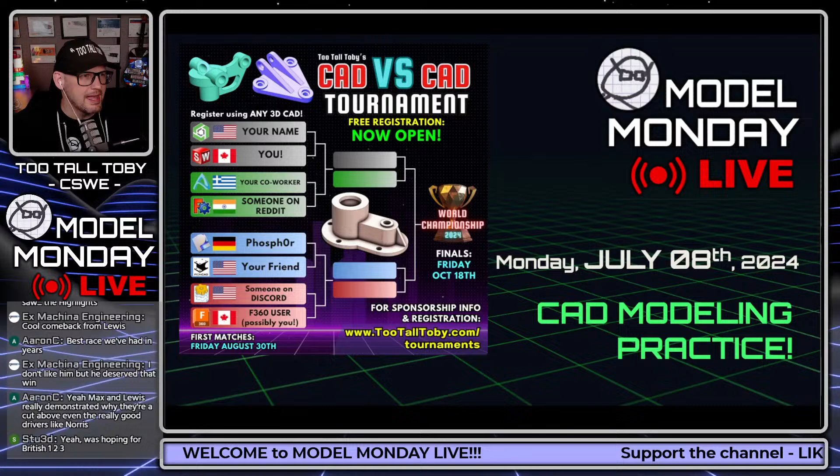Alrighty, let's get into it here. Welcome, today is July 8th, beautiful July 8th, beautiful Monday, what a great way to start the week. Monday, July 8th, and welcome to your CAD modeling practice, Model Monday Live, where you get to compete against other members in the chat. Today we're going to do 2 of these CAD speed modeling challenges, you versus the chat, we'll see who's the fastest in the chat. We're going to do a tournament update, we're going to talk about a live solve using SolidWorks, and of course we're going to interact with the best chat ever.

Today I'm going to do this as the live solve. This was the challenge that I dropped on the YouTube channel on Thursday, the 4th Fireworks, it's called. And it's a cool model, it's not really that difficult, it's only tier 3, but there's some really cool stuff that we can learn from this model. Of course, I'm going to show you guys how to do the candy striping that's running up the body of that rocket as well, some cool techniques you can use to do some split line action there.

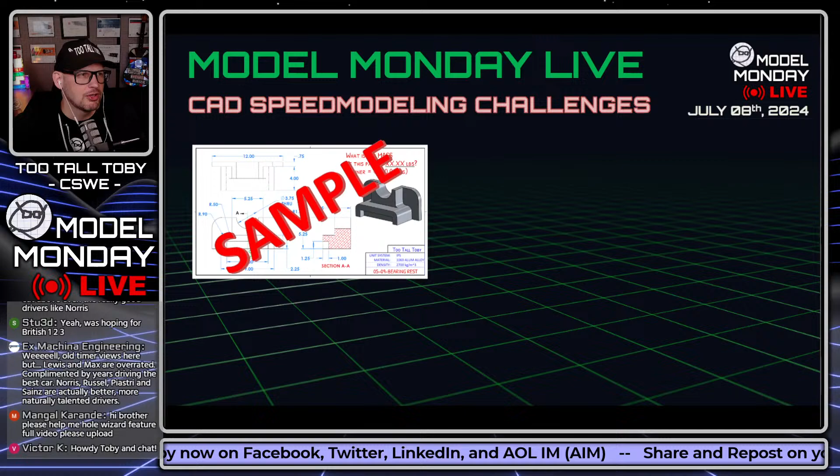And with that, let's get into it. I know what you guys are all here for, I know you guys are really all here for the F1 debate in the chat, but I think some of you maybe are also here for the live CAD versus CAD challenges. So let's go, we're going to show you guys a 2D print, and we're going to have you turn that into a 3D model as fast as possible.

Victor K joining us in the chat, what's up, welcome.

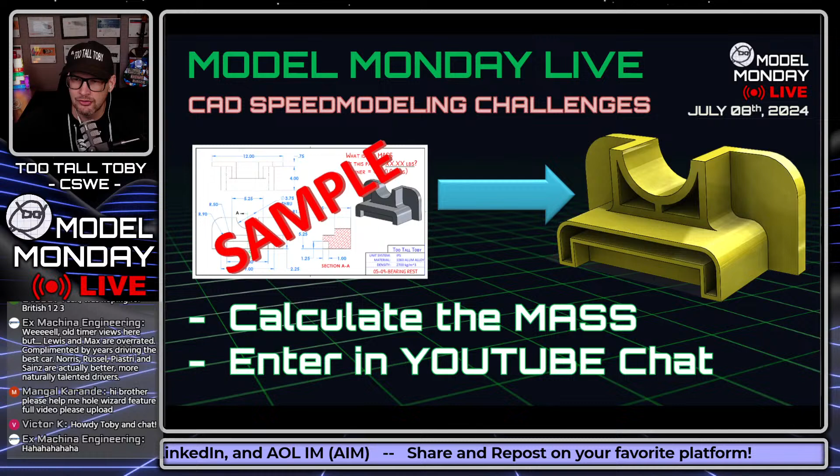Guys, after I show you this 2D print, you're going to try to turn it into a 3D model. You're going to try to calculate the mass, and you're going to try to enter that mass directly in the chat in YouTube. The first person to enter that mass correctly is going to be declared the winner. It's going to get points on our Model Monday Live leaderboard over at TooTallToby.com.

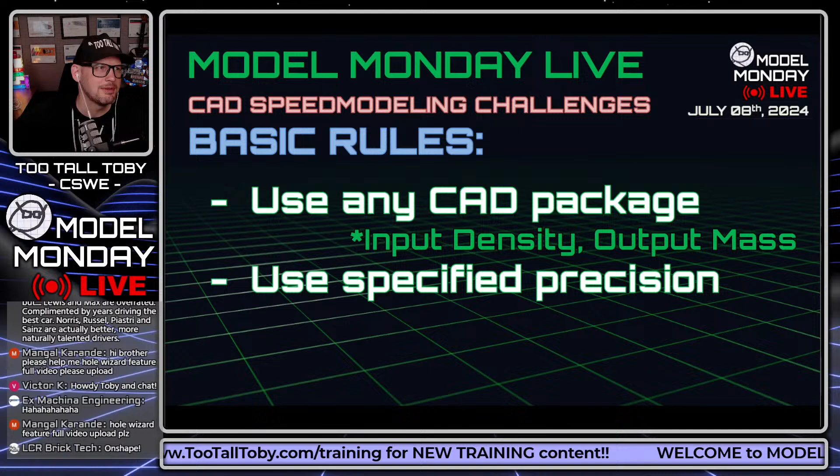Guys, if you're competing today in Model Monday Live, here's the basic rules. You can use any 3D CAD package, we are truly CAD agnostic here. You're going to input density and output mass, meaning as long as that CAD package can accomplish that. Even some CAD packages can't do that, they can only do volume, and then our users manually input the mass and calculate it. That's fine, any 3D CAD package can be used here. But make sure when you answer, you use the specified precision. Very important, use the specified precision. LCR Brick Tech, giving a shout out to Onshape, always good to give a shout out to Onshape. And guys, the first person to answer correctly in the chat will be declared the winner.

So I'll show you a 2D print, you'll try to turn it into a 3D model. Here's the unit system and the densities that we use.

Jonathan, you mentioned you're here for the first time. Mangal, I think maybe you're here for the first time as well. You're going to want to make sure that you take a screen capture of these densities and add these densities to your materials library. If the density is not correct, then you are not going to come up with the correct answer, that's for sure. So if you're using something that has the material library and the densities are different from these, take a second and create a custom material.

Today I'm drinking, oh this is kind of cool, a cherry limeade Waterloo. Look at this thing, cherry limeade. Let's go, pretty good, pretty good. I like those blackberry lemonade ones, I think I like those a little more.

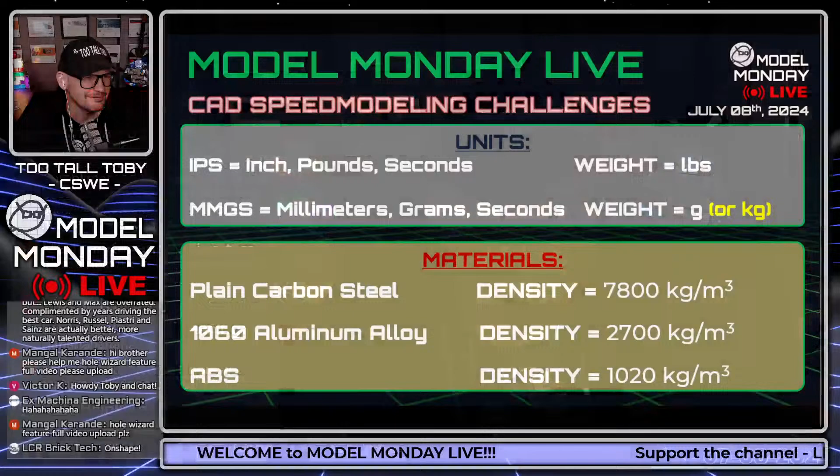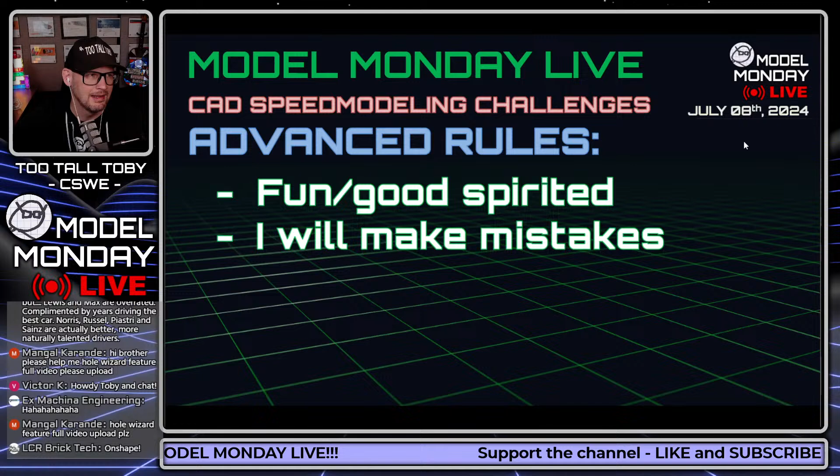All right guys, hopefully that was enough time for everybody to grab a screen capture of these densities, because now we are going to get into this challenge. It's meant to be fun and good-spirited. Occasionally I'll make a mistake, I'll miss a dimension, something like that, we'll just do an audible and try to resolve it. And the Ivan exploit is permitted, I got a video on that coming soon. The Ivan exploit is permitted during Model Monday Live.

So with that, let's flip over to full screen here. And as soon as I show you this 2D print, you're going to grab a screen capture, maybe put it on your second monitor, and then you are going to begin modeling this challenge. Here we go, this Model Monday Live 3D CAD challenge begins in 3, 2, 1, go.

What is the mass of this part in XXX grams? The tolerance is plus or minus 1 gram. This part is in millimeters, using plain carbon steel as the material, 7,800 kilograms per cubic meter. Tier 4 part, probably the lower end of tier 4, but there's definitely some trickiness to this part that pushes it up to tier 4. It's called upper alignment cap, upper alignment cap.

So check it out, good luck to everyone. Grab a screen capture, we're only going to leave this up on the screen for a couple more moments. I'm going to take a sip of my delicious beverage, and then we are going to move on with today's live stream.

Your goal is to take this model, this 2D print, and try to turn it into a 3D model. And guys, we got Victor K in the chat, the world champion of 3D CAD speed modeling. This is your chance to play against the best. If you want to be the best, you got to beat the best. Victor K is in the chat, the best, he's here with us, and you get a chance to compete against the world champion. Good luck to everyone on this model, upper alignment clamp.

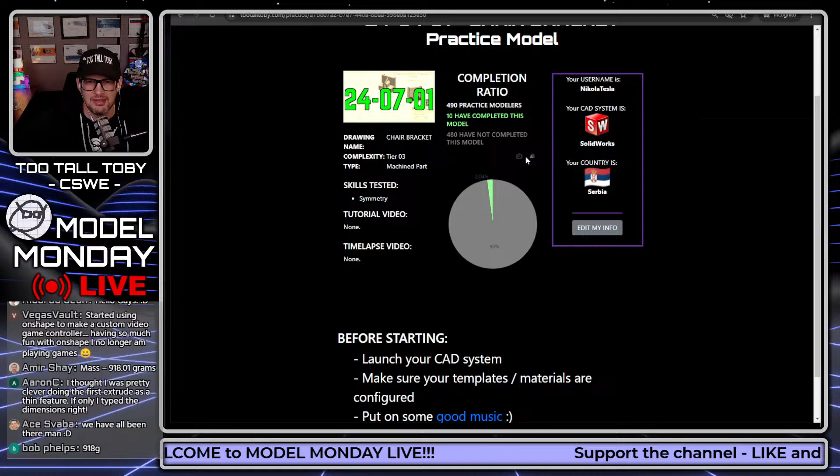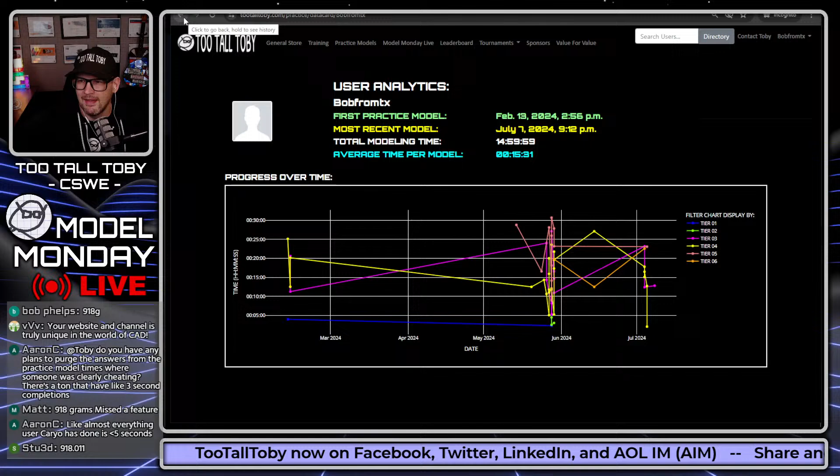So pretty cool that we can see all of these great analytics from all the users. Definitely a lot of fun. And I just think it's so cool that on this Practice Models app, we're not even doing any kind of push notification, and yet people are getting logged in here and right away completing these models almost the same day that I post them.

So if you're ever interested in getting more practice, we've got 58 models up there right now. We're going to have more and more. We try and do 9 every month. So check it out and enjoy, and good luck.

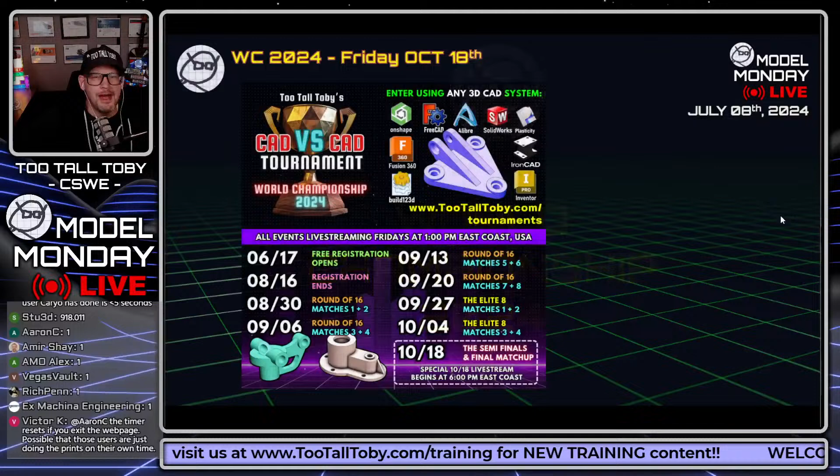Finally, the World Championship 2024 is upon us. We are currently in...

Those times don't show up in the per print analytics page. That's correct, yes. So Victor K is asking, is it possible those times are users just doing the print in their own time? Yeah, so a couple of comments are coming in here.

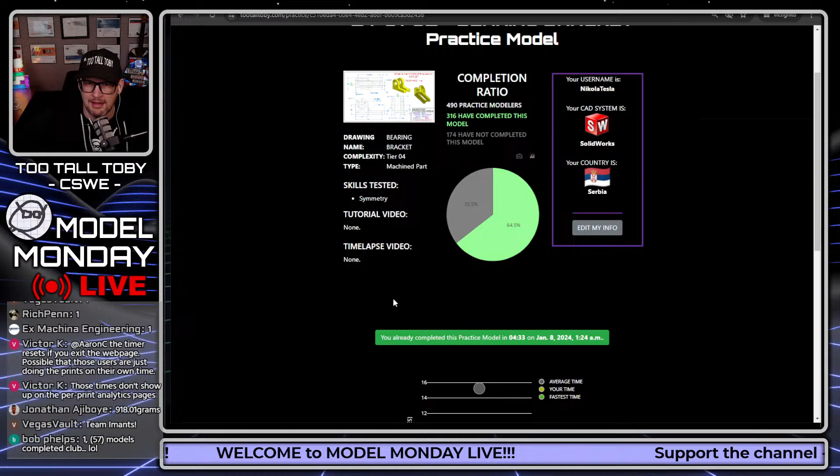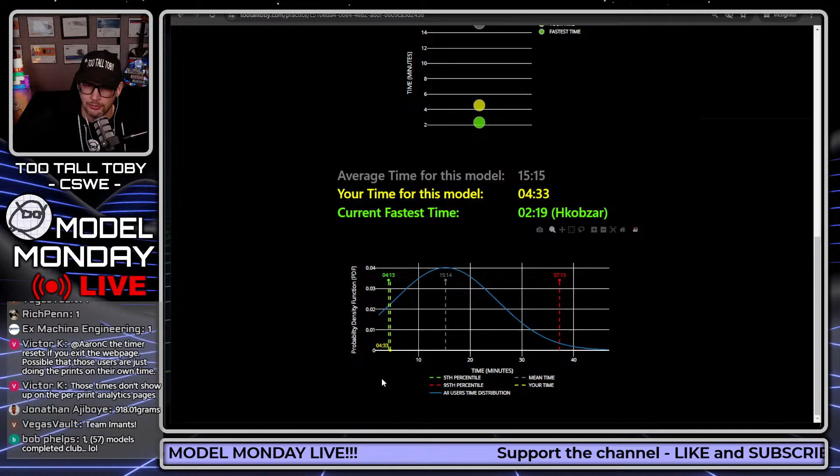Victor K is saying you could log into that Practice Models app and then back out of it and kind of game the clock a bit. And that's true—we want the app to be something for everyone. So that is true, you can get in here and view the print and then back out and do it in like 2 seconds. We do have a purge of a high and a low range on these charts. So anything that's under an unreasonable amount, we just purge it. On this one, it's probably around 60 seconds or something like that, so we just purge it. Although probably there are some speedsters out there that could do it in less than 60 seconds.

These analytics here are for that model, for that challenge. So this whole page, when you complete it, you're going to see additional analytics down here, like your time, the average time, and the fastest time. These are analytics specifically for that challenge.

Where this one here, in the upper right, this is my analytics, the analytics for you, the runner. And that's what we're seeing on the scoreboard too. So if I click my analytics, these are the Nikola Tesla analytics.

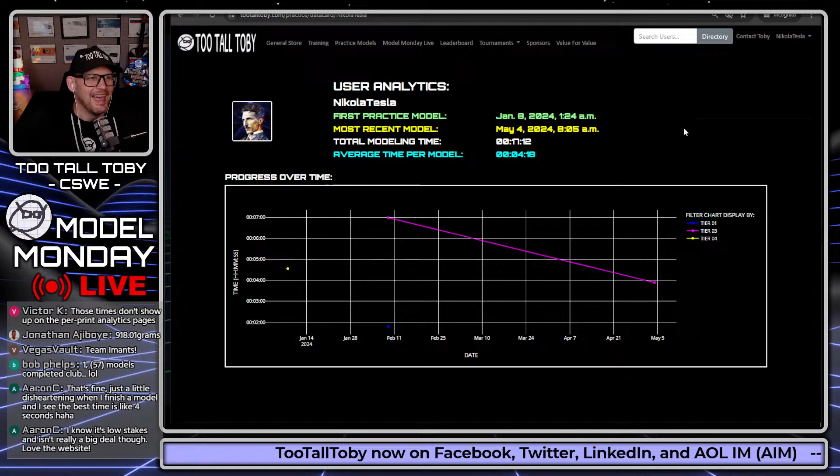I've done a total of 4 models, and my total modeling time is 17 minutes, and my average time is almost 4:20. That's amazing, 4 minutes and 18 seconds. And if you look at that community scoreboard, you can see some of the other users and go through their analytics as well.

Aaron C says, I know it's low stakes and it isn't really a big deal, but I love the website. Well, thank you. It's high stakes for me. If it doesn't work, then I'm going to be out on the streets. So low stakes for some, high stakes for others.

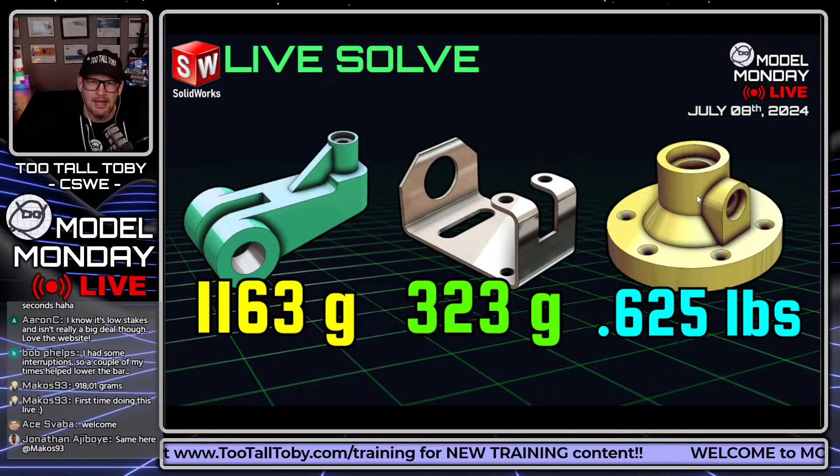And the tournament leaderboard is now live, so you can start to see how different people are solving these. We got QWERTY CA. A lot of people have been keeping an eye on QWERTY CA because of his fantastic performances here in the monthly leaderboard. If you go to TooTallToby.com and go to tournaments, let's go to the World Championship, you'll see that QWERTY is now here on the tournament leaderboard.

So we're going to get to see QWERTY live during the tournament, competing against other runners, and once again putting up an absolutely stellar performance, 3 minutes and 30 seconds using SolidWorks. Pedro Tavares, also very impressive. Anything under 5 minutes is like super speed as far as I'm concerned.

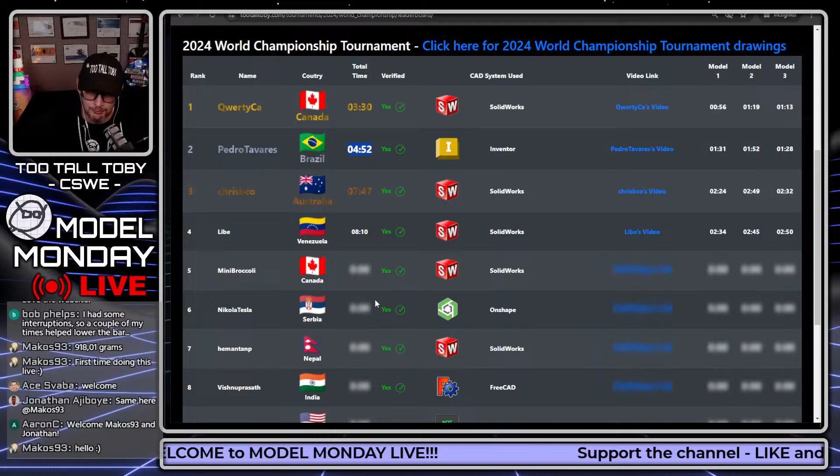My time was way down here, like over 10 minutes I think. So anything under 5 minutes is just outstanding, amazing. You know, chrisbco, he got third place earlier this year in the Spring Open, and look, he's coming in at 7 minutes, 47 seconds.

So it doesn't always matter who's the fastest on this leaderboard, but it is pretty cool because you can watch these guys' videos. You can watch QWERTY, watch Pedro, watch chrisbco, watch Libe's videos, and see how they're navigating through these models so quickly and maybe pick up some tips and tricks. Like QWERTY uses intersect a lot in these runs, and there's probably some lessons we could all learn there about using intersect efficiently to lop off huge chunks of the model. So check out those videos, definitely a lot to learn from those videos, live solving these parts.

In the tournament, all the parts are going to be tier 3 and higher. All of the challenges are going to potentially include sweeps and lofts with guide curves, sheet metal, and multi-body / multi-material. So make sure you're aware of how to do these things: sweeps and lofts with guide curves, and multi-body, multi-material in one single part file. It's going to give you a very, very fast time.

Makos93 says, first time doing this live. Nice job, good job getting an answer. That is awesome. Anybody who gets an answer in the limited time we have together should be very proud. And even if you don't get an answer, even if you just try, you should be very proud. This is not easy, and it feels very high pressure.

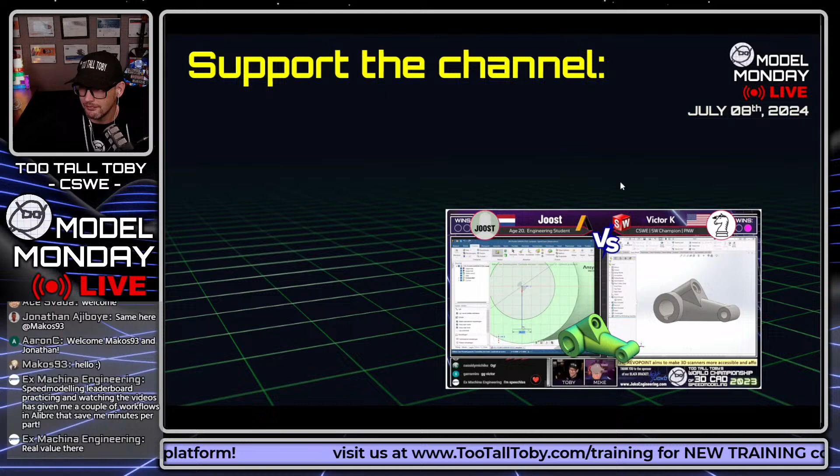Ex Machina says, speed modeling leaderboard, practicing and watching the videos has given me a couple of workflows in Alibre that saved me minutes per part. Real value there. Thank you.

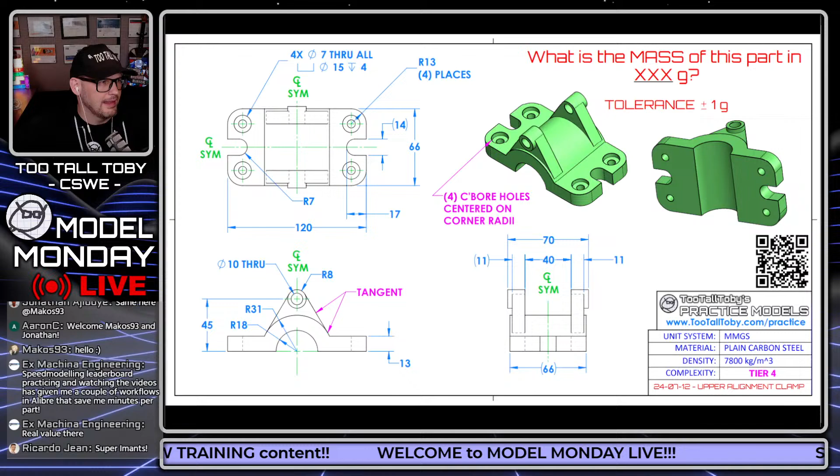Yes, indeed. All right guys, let's take a look at our first answer here. This model is pretty cool, the upper alignment clamp. I hope you guys had fun with this model. Let's take a look and see how we did. Saw those answers coming in. The first couple answers really came in fast, so very impressive. All right, let's go, let's see what we got here.

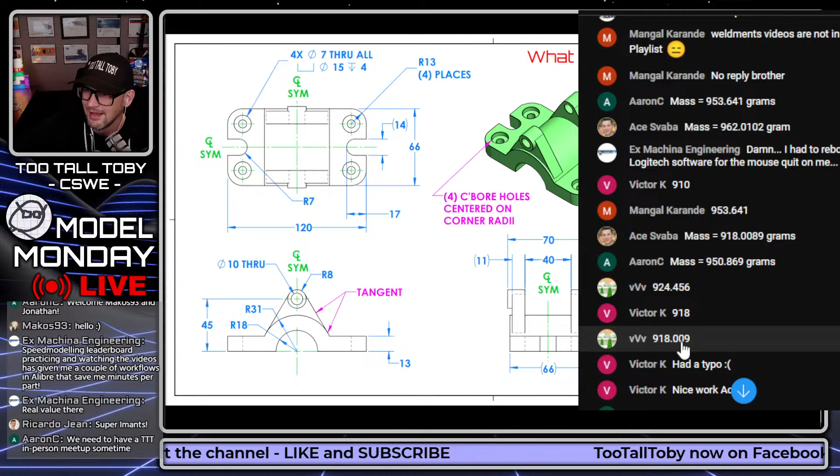Here we go. Aaron C coming in, 953.64. Ace coming in, 962.01. We got Victor K coming in, 910, world champion at 3D CAD speed modeling. We got Mangal coming in, 953.641 - oh, matching Aaron C. Interesting. We got Ace revising to 918.0089. We got Aaron C revising to 950.869. We got VVV coming in 924.4, revising to 918.009.

Aaron C revising to 918.009. That's amazing. I guess Mangal did the exact same workflow that Aaron C did, and that's why he came up with the exact same mass. So whatever Aaron C did wrong in the beginning, Mangal must have done the exact same thing wrong. That's amazing. We got Aaron C revising to 918.009. We got AMO Alex coming in 918 as well.

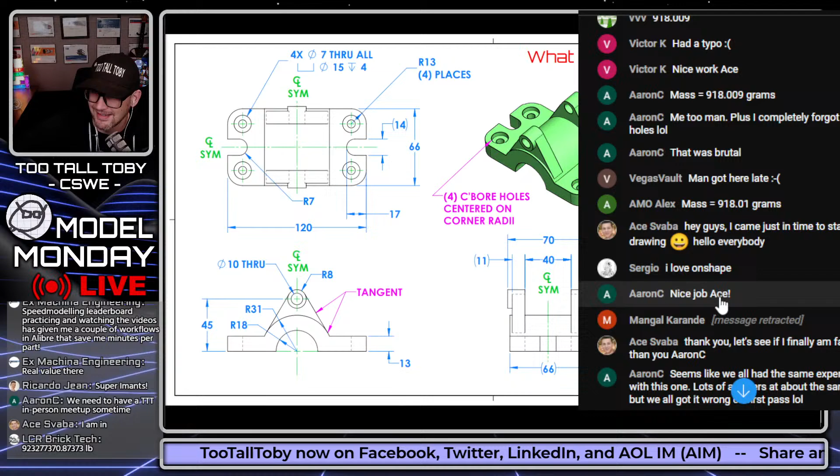Very nice, very nice. Some congratulations going out here already. I like it, I like it. We got Amir coming in 918, very nice. Bob Phelps coming in 918. Matt, 918 grams, missed a feature, nice. Stu, 918 grams, very nice. Jonathan, 918 grams, first timer, well done, well done. Makos here, first timer, 918 grams. And LCR Brick, looks like he just fired in a bunch of numbers there. I like it, I like it.

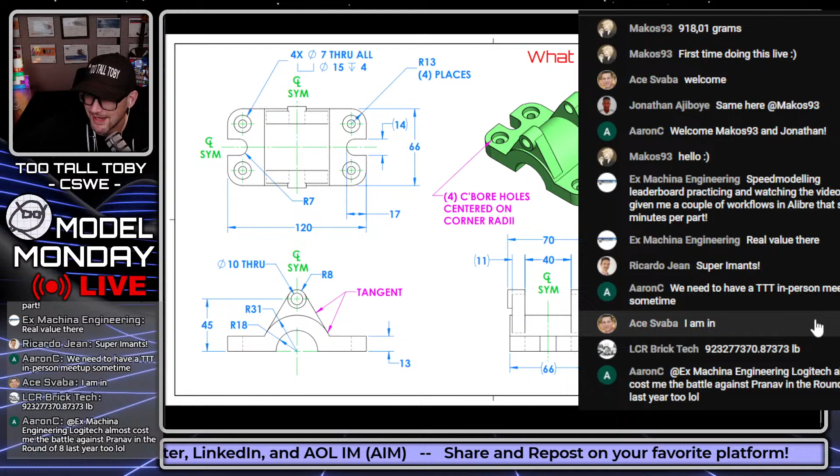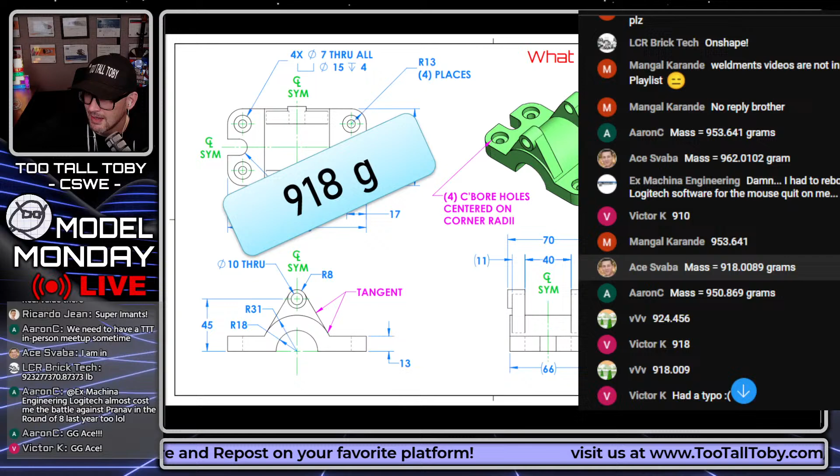All right guys, let's go. Let's see what the correct answer is. The correct answer is 918 grams. Well done, well done. I think that one goes to Ace coming in with the... wait, was it VV? Wait, who came in with the first one? Ace came in with the first one, right? Let's see, Aaron C, Ace, Victor K 910, Mangal, and then Ace coming in 918. Well done, well done, well done. Congratulations Ace, GG to Ace in the chat.

Oh yeah, oh yeah, very very nice. LCR Brick still trying to guess. One of these will be correct. Don't forget, you get unlimited guesses in Model Monday Live, LCR Brick, so one of these will be correct. All right, GG Ace, well done, well done. You're going to get recognized on the Model Monday Live leaderboard, earning a point here in this live stream.

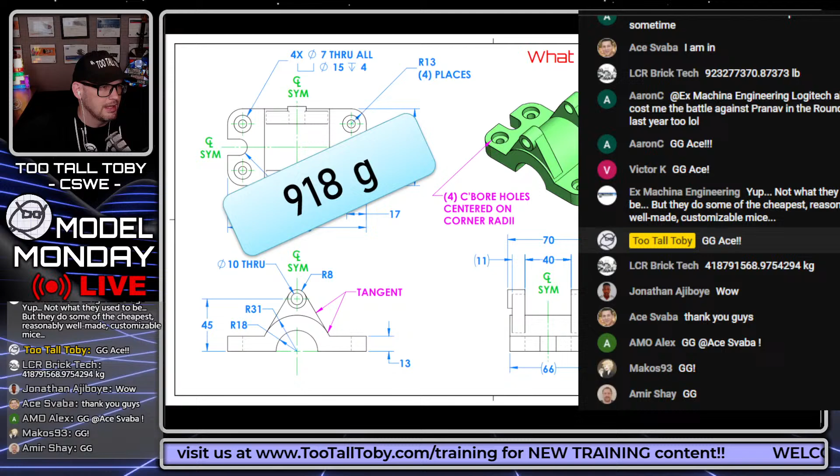Congratulations. Now, here's the question: can you do a clean sweep? Because this next 3D CAD challenge begins now. Guys, get your screen captures ready. This next 3D CAD challenge for the chat begins in 3, 2, 1, go. Here you go, guys.

Ex Machina says, nope, not with the kids in the room.

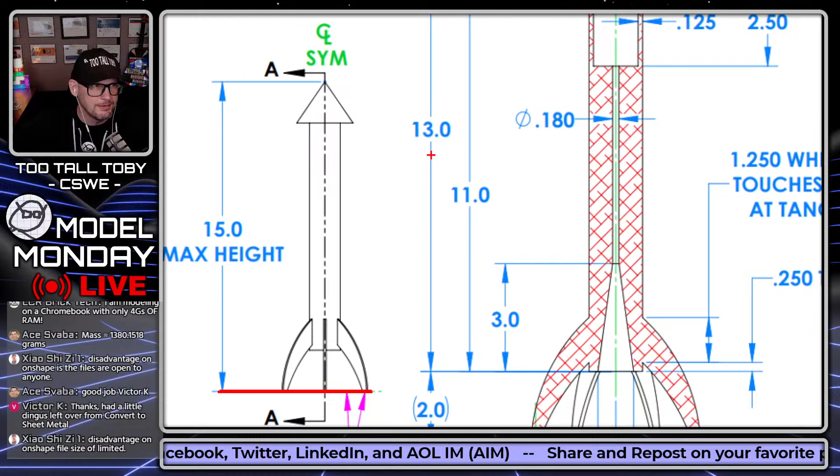So now the only question is, where should the origin be looking at this thing from the front? And I think it's fair to say that there's a lot of dimensions that seem to be coming from the base of this rocket. So like this 15 height, some of the dimensions down here are coming from the base of the rocket. So now we've got the location of the origin.

The origin is going to be right here. It's going to be centered looking down from the top, and it's going to be where most of the dimensions are coming from. Those are the things you're looking for when you're trying to decide where to locate the origin in a new model.

Then what you need to do is discretize the model, meaning you need to break down the model into different sections and decide how you're going to model those sections. Now, if we were doing this for engineering purposes, we would probably take into consideration that the parts are actually made as different parts. But since we're just doing this all as one single model, we don't have to worry about that as much.

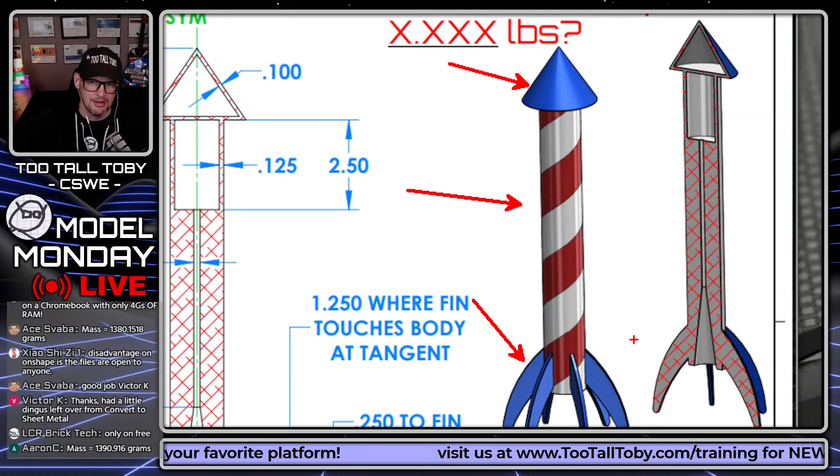So I think the way that I would discretize this model is I would probably do it in 3 sections. I would say that the fin is one section, so the fin and the pattern of the fin. The main body with the cone up top is another section, and then the cut extrude on the inside is a section of the model.

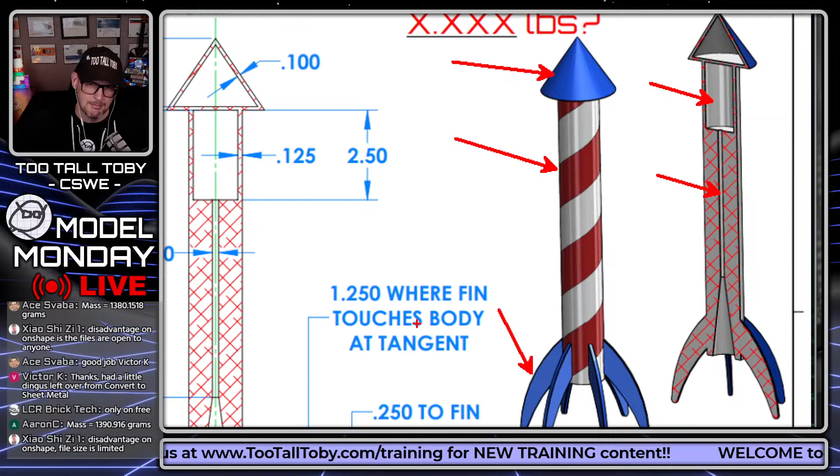So it's like I'm breaking up the model into these different sections, so then I can start deciding how am I going to model each section and what order am I going to model them in. Well, since the main body here is really foundational to these fins existing, I think it makes sense to model the main body first.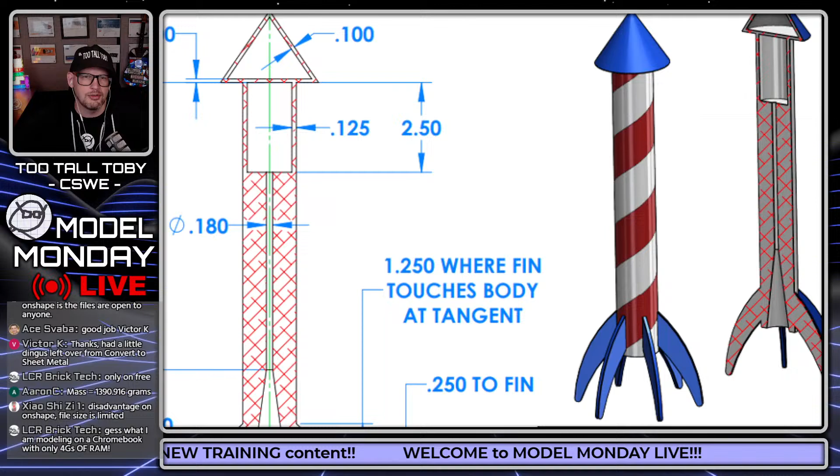So the first sketch that I create is going to be the sketch for this main cone. And this is something else you always want to be thinking about when you're trying to decide how to go from a 2D print to a 3D model: you want to ask yourself, where's my origin going to be? Well, we already figured that out—the origin's going to be right at the center here.

And then you want to ask yourself, what's my very first sketch going to look like? And I think that for this model, my very first sketch is going to look something like this: it's going to come over, up, over, up at an angle, and then straight down to the bottom. And that's what my very first sketch is going to look like. By doing this exercise, thinking to yourself what's my first sketch going to look like, it really sets you up nicely to go through and create the rest of the model.

So now what's my next sketch going to look like? My next sketch is going to look like the sketch of this fin. I think I'm going to bring the fin all the way into the center of the model. So my second sketch is going to look something like this.

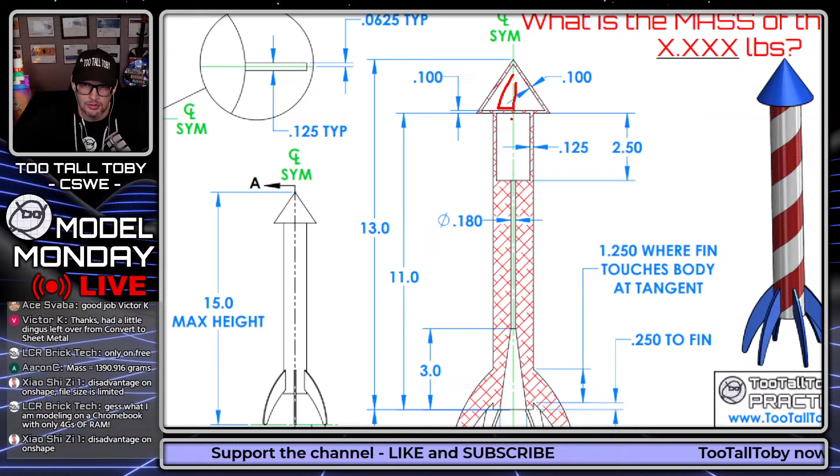And then I'll be able to extrude that and do a circular pattern. So what's my final sketch going to look like? My final sketch is going to capture some of this information that I'll need for the cut extrude. So it's going to be a half triangle, a half rectangle, and then maybe this area coming down here.

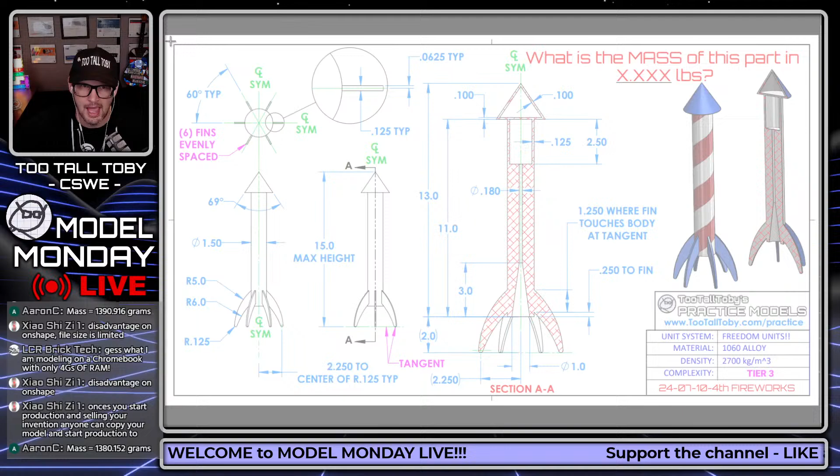And then I'll be able to do my cut revolve for that final section. So whenever you're trying to go from a 2D print to a 3D model, this is the exercise you want to do. Now that I've done that, I'm ready to do a 2D screen capture. Let me bring up my screen capture software, grab a capture of this print, move that over onto our second screen, and let's get into creating this model using SolidWorks.

So here we are in SolidWorks, and now we're going to take that game plan we just came up with and turn it into an actual 3D model. Along the way with this model, I'm going to show you a lot of cool tips and tricks. So even if you already did this rocket, take a look, you're going to learn some pretty cool stuff. And at the end, we're going to show you how to do that candy striping as well.

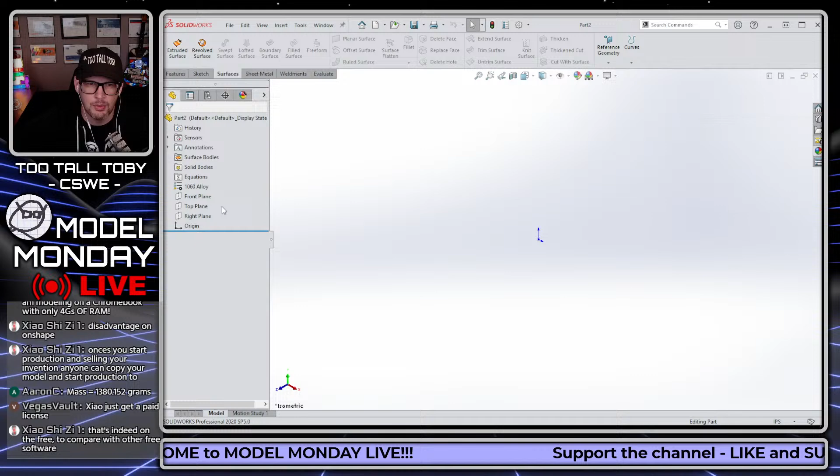So here we go, new part. This part is going to be in inches and 1060 aluminum. And we're going to go front plane, begin a sketch, because we decided our first sketch is going to be that kind of revolve shape of the rocket.

Now we're going to create a center line. So S key, center line, single click here. We're going to move up and bring the center line up to a height of 2 inches. And now we can jump into the S key again.

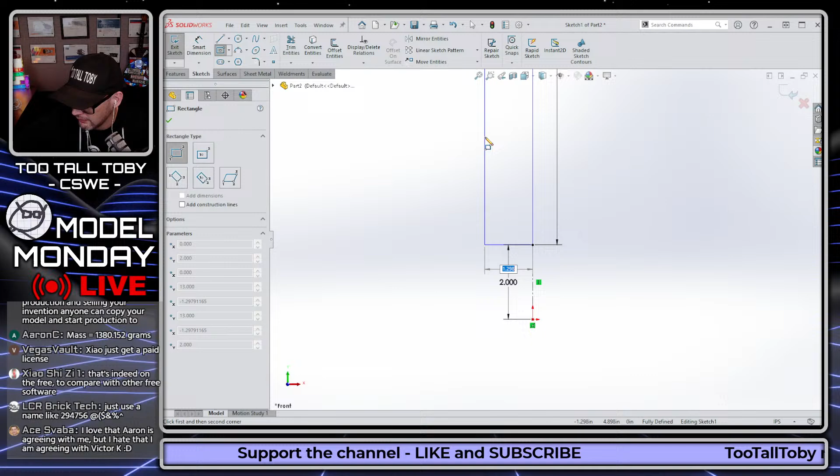We could maybe make a rectangle here. Let's say we make a rectangle that has a height of 11 inches and then has a width here of 1.5 over 2, since that's going to be our diameter.

And then we can hit escape, get rid of that dimension, that 0.75, and then create another dimension. This dimension is going to start at that vertical line, and then go to this vertical center line we created. And when we cross over that vertical center line, that gives us a doubled dimension for that 1.5 inch diameter.

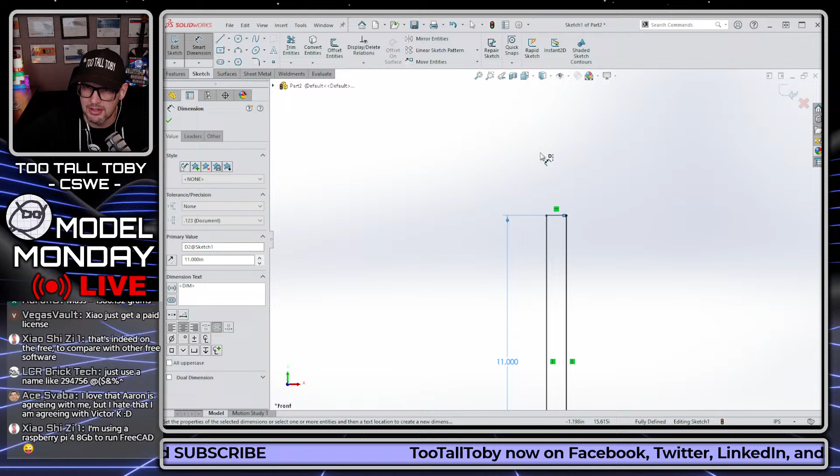So now the final element of this sketch is we need to create that triangle shape, or half triangle shape. So we'll come over here like so, come up like so, and create that kind of half triangle shape.

And now we're going to create a dimension for the overall height of the model, so all the way down here to the bottom of 15 inches. And then we're going to create an angle dimension.

So the angle dimension is going to go from this half line of the triangle, or the hypotenuse of the triangle. And then we're going to hold shift, and we're going to pick this center line down at the bottom here.

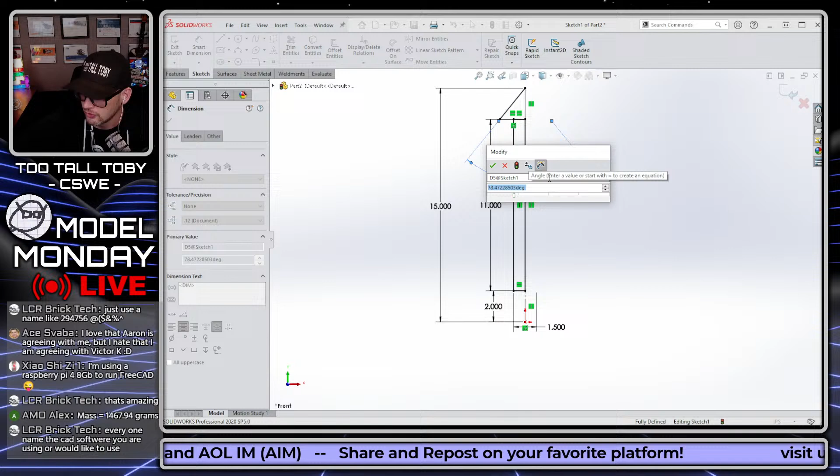It's really, you don't have to hold shift ahead of time, but if you hold shift afterwards, then you can get this double dimension. So that's kind of a cool little hidden SolidWorks trick. If you want to get the double dimension for the angle, you have to hold shift. So we're going to type in 69 there. There's our angle for that.

And we are ready to move on to the next feature in this process of building this model. So for that next feature, we could take this and turn it into a revolve, but since we're going to be referencing this sideline of the rocket as we're creating this next feature, maybe it makes sense to create that fin right away.

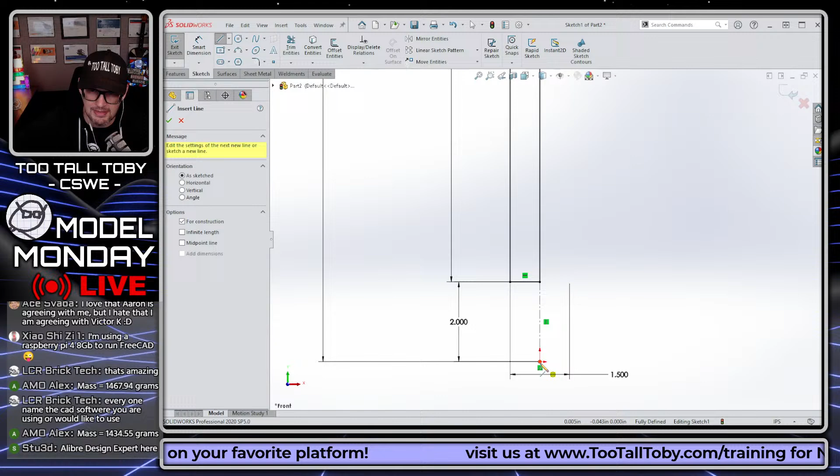So I'm going to come over here with a line to 2.25, and then I'm going to come up vertical here with a line of 0.125 for the radius.

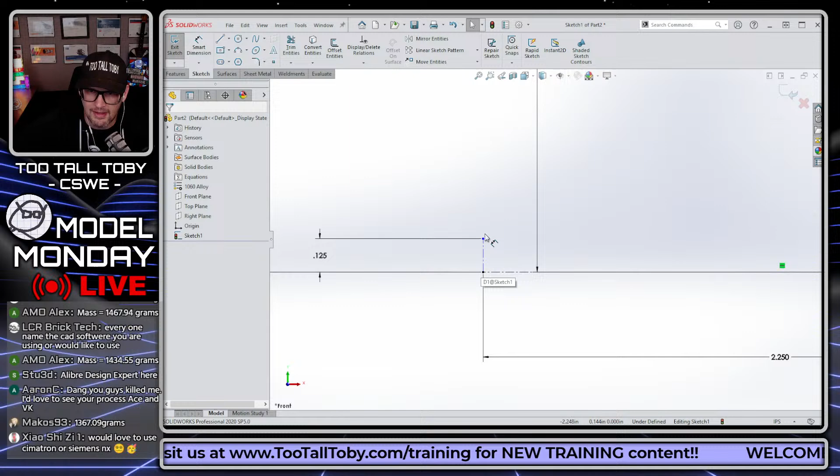So you can see that what I did there was I just created a center line. This is not a solid line, it's just a center line that comes over here to a distance of 2.25, since that's where the center of that fin exists on our drawing. So now that I've got that line coming over, that line coming up, now I could get in there and maybe do like a center line arc.

So this is radius 0.125, and it's going to start here and come around to something like this. And then I could jump into a line command, and I could click this endpoint, come back, touch the endpoint, come off of it, and then type in a radius here. So that outer radius is a radius of 5.

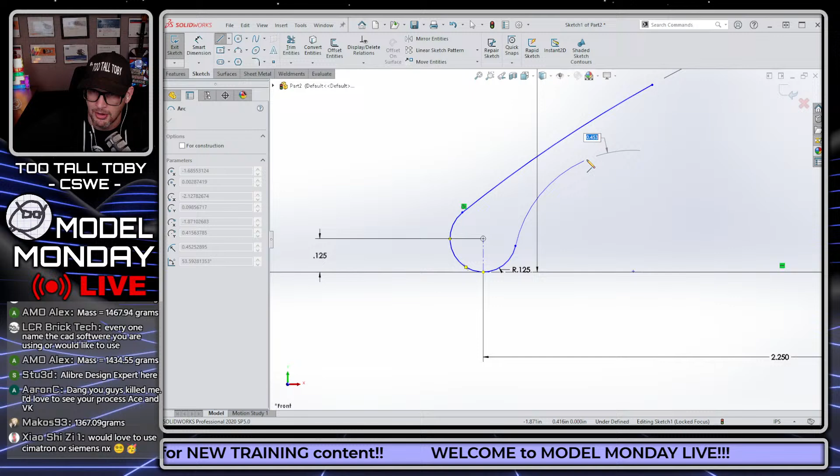And then I could do the same thing here with this inner radius. So click this point here, come back, touch the endpoint, come off with a tangent arc. I know we could just do it with the tangent arc command, but we're going to be using the line command a lot in this process. And so there we go. Now we've created those 2 arcs.

Now at this point, what I like to do is just hit escape and kind of drag the endpoint of the arc, and just kind of get these close to where they need to be.

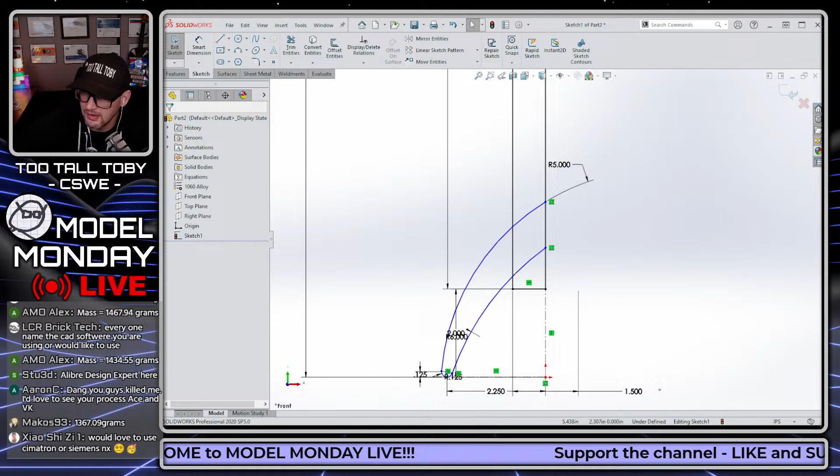Now, by close to where they need to be, what I mean is on the print, what the print is calling out is that these are going to start at a distance of 0.25 from the base up to the fin. Let's zoom in here a little bit. So 0.25 from the base up to the start of the fin, and then 1.25 where the fin touches the body at tangent.

So what you might think is you could create a sketch point there and then use that sketch point to define your dimensions. Well, here's a little shortcut for helping with that. Instead of choosing the sketch point and then coming in here and hoping that you get intersection, which most of the time when I try to do that, I end up getting coincident instead of intersection. I end up missing it a little bit.

Instead of doing it that way, just do a crossing select where you pick the line and the arc and then click the point command. This creates what's called a virtual sharp, which is just a sketch point with an intersection command. So do a crossing select on both of these, then click the point command, and that gives you a point at the intersection of those 2 entities.

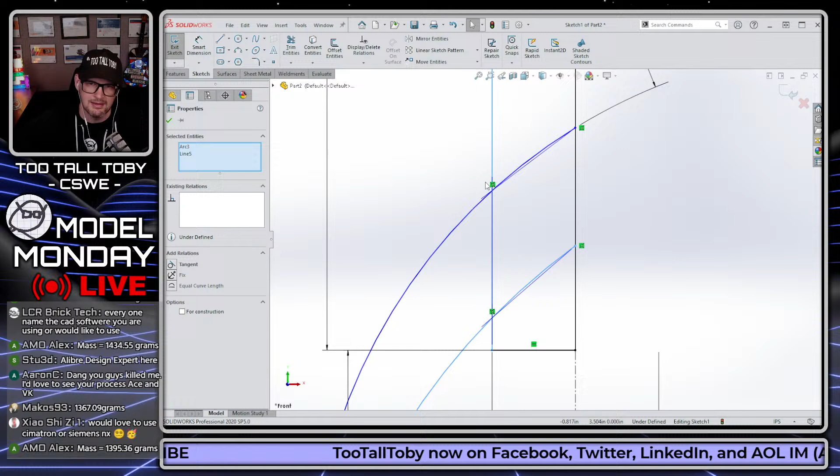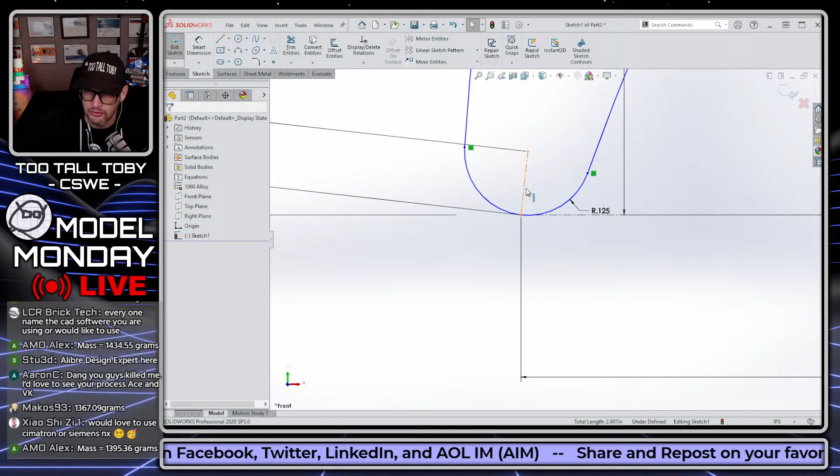So now you can add those dimensions that we were looking at on the print. This dimension is 0.250, and this dimension here for that overall width of the fin is 1.25. It's kind of a cool little trick you can use to make sure your point is exactly at the intersection. We just need to make sure that this is tangent here, and make sure that this is vertical. There we go. That sketch is nice and black and fully defined, and that gives us the location of the fin and the main body for the revolve.

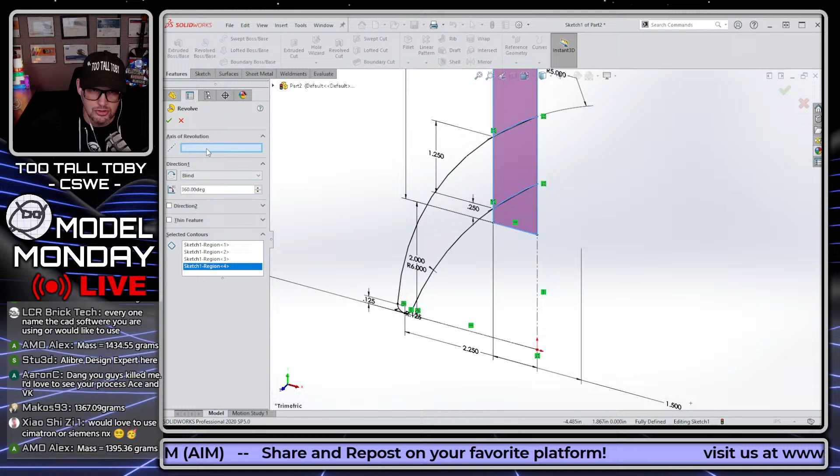So let's go into our features command, revolve, and now we're going to choose to revolve this region, this region, this region, and this region, and our axis of revolution. Those are all landing down here under selected contours, and our axis of revolution is going to be this axis right here. That revolves that into that main shape.

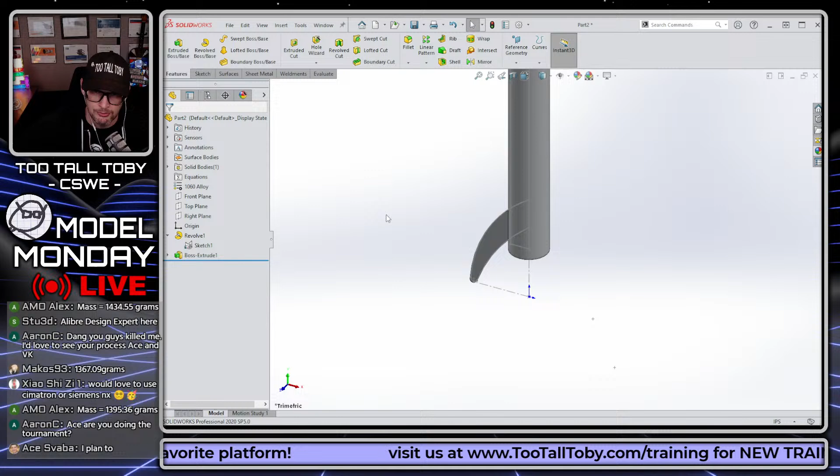And then I'm just going to show that sketch again, and now I'll click on the sketch first, and then I'll choose extrude. Now once again down here in our selected regions or contours, I'm going to pick this region and this region. That's going to go out to a depth of 0.125 for the fin. And then I'll right mouse button in the background and say mid plane, and then right mouse button again. So there we go. Now we've got our fin.

Now I'm going to take that fin and do a circular pattern. So I'll just pick on that boss, hold control, pick on this face here, let go of control, jump into circular pattern. Whoops, sorry, that got that revolve as a feature. There we go, pick on that face. And then that is going to go out to 6 instances equally spaced across 360 degrees.

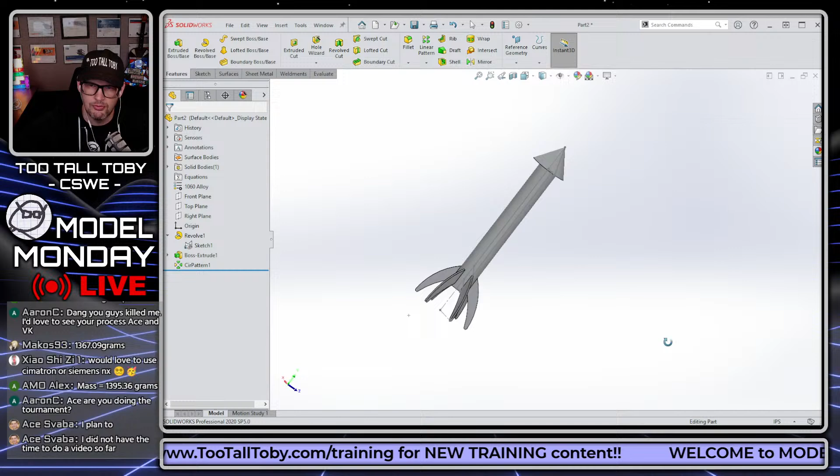So there is our fin for that rocket. And now the only thing left to do is to add the interior geometry.

If we right mouse button on this sketch and go to sketch color, we can change that color to something that really pops out. That's going to make it easier for us to reference that sketch while we're creating the next feature or sketch. So here we can go into our front plane, begin a sketch, and now we want to create a line here which is parallel to this line. So we go S key, go to begin a line command, and come over.

This is definitely an advanced trick that I'm going to show you guys here. I think some of you more experienced users will really appreciate this, but I think some of you newer users will be able to learn from this and use this.

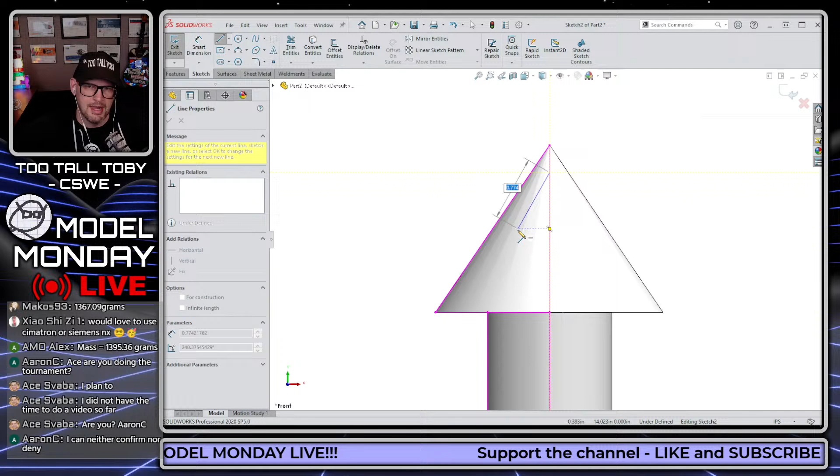So you can see here that I'm in the front plane. I'm going to begin the line command, click here to begin it, come down, and hold my cursor over this line here, which kind of wakes up the parallel relationship. But you see the relationship is showing in white. When a relationship shows in yellow, that means the relationship will be added. But when it shows in white, that means the relationship will not be added.

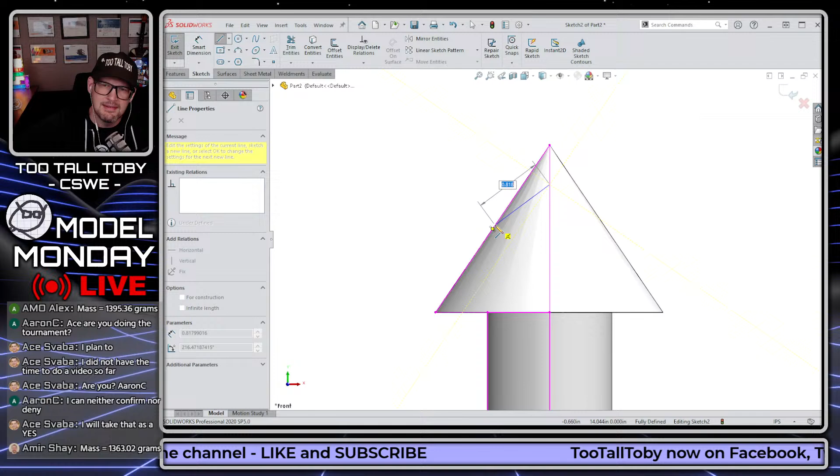So if I click here and then come over here to close this thing off, what we'll see is that point is not enforcing a parallel relationship. However, those lines are exactly parallel. And what that means is if I add a linear dimension from line to line, that'll create a parallel relationship, kind of embedded in the linear dimension.

So if I start out here by creating the line, you'll see it doesn't pick up on parallel, I don't get anything. If I hold my cursor over this line first and then come back, now it gives me a white parallel relationship, which means it is parallel, but it's not going to add the relationship, the parameter. So now I'll close off this triangle.

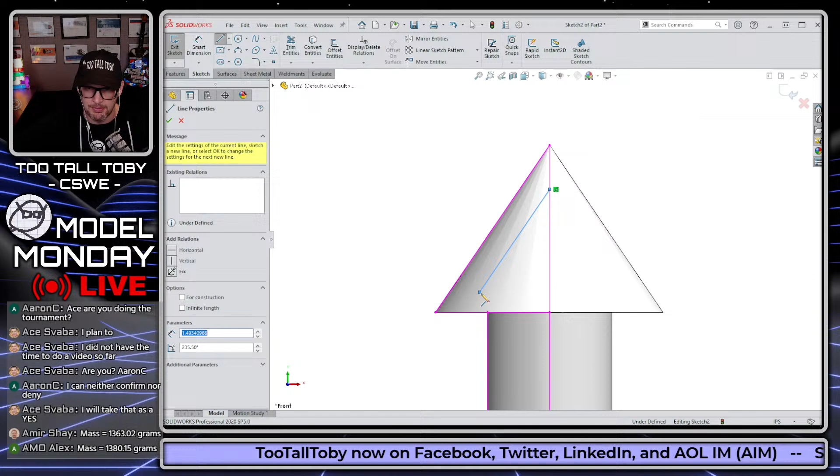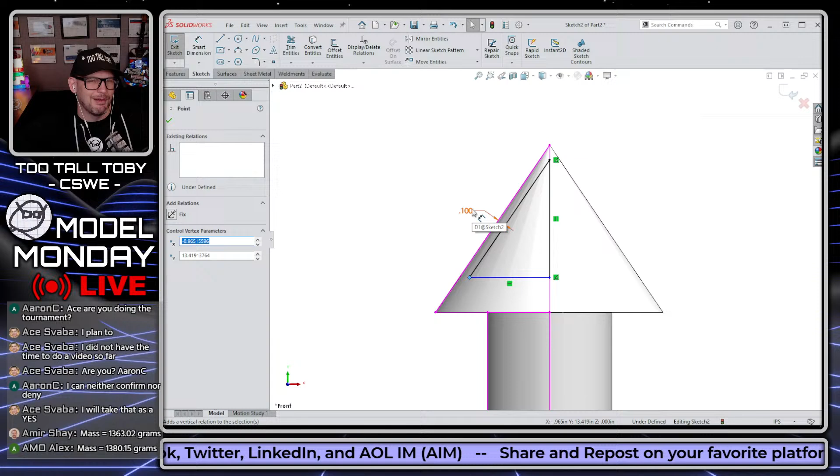Then I'll jump into Smart Dimension, S key Smart Dimension, and create a dimension from this line to this line, and that dimension is going to be 0.1. I'll create a dimension from this line to... actually I won't add that one yet, just to show you before and after. See, now when I go to move this around, parallel is being enforced not through a sketch relationship, but through a sketch dimension, which kind of has parallel built into it.

So it's really nuanced, but definitely one to look out for, and it can save you some time as you're working through SolidWorks, recognizing that you can make two lines parallel using a dimension if you just remember to dimension from line to line. Don't pick the end point, but pick like line to line here. Now I'm enforcing parallel between those two lines.

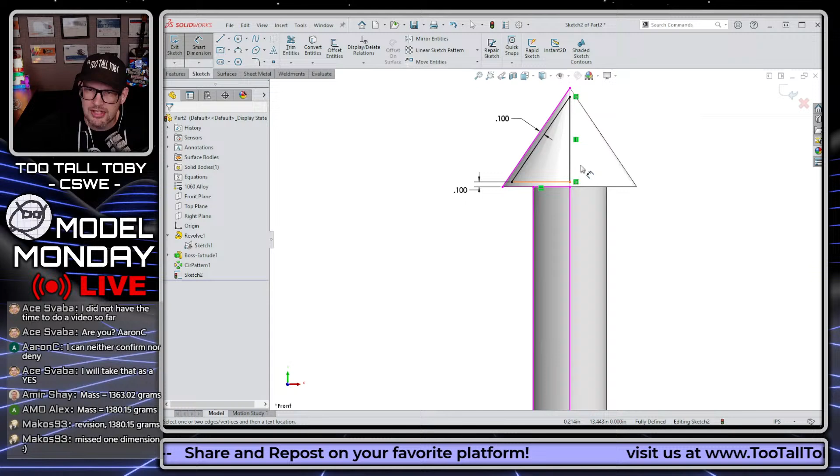Kind of cool. So now I just need to create the remaining geometry here. I'm going to create a rectangle that comes down like so. Then I will create a vertical line here, and then a line that comes down at an angle. Try not to pick up midpoint when you do this line, that can be a mistake people make. So bring a line down here to this lower line, and then finish off here at this point.

And then all we need to do is trim this line here, and then take this point and just merge it down here to this point. Let's merge those two. Then let's give ourselves another center line so that we can get some diameter dimensions like we did earlier.

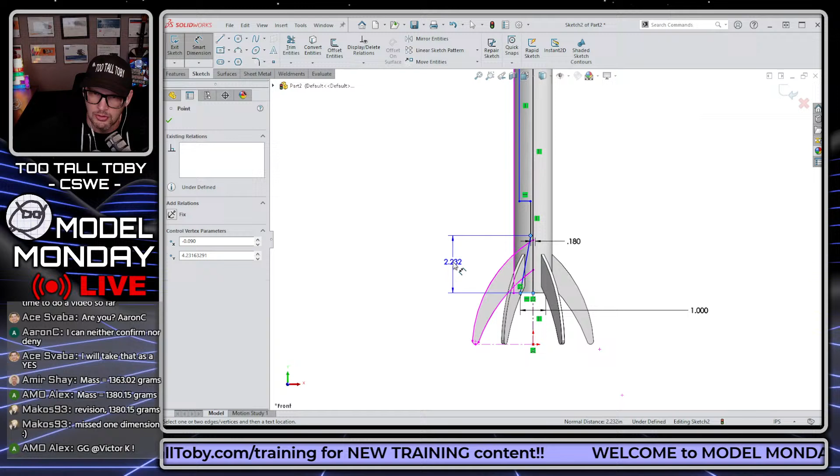That double dimension is going to be from here to here, a double dimension to 1 inch, from here. Again, it automatically picks up on that center line once you do the first one. So this one's going to be 0.180. And now we'll just do some standard dimensions, like a dimension here to 3 inches and a dimension here against this wall of 0.125, and then a final dimension here for this upper chamber, 2.5 inches.

And that should do it for that sketch. Let's turn that into a cut revolve. So we go features, revolved cut, and then we're going to say, yep, that's it.

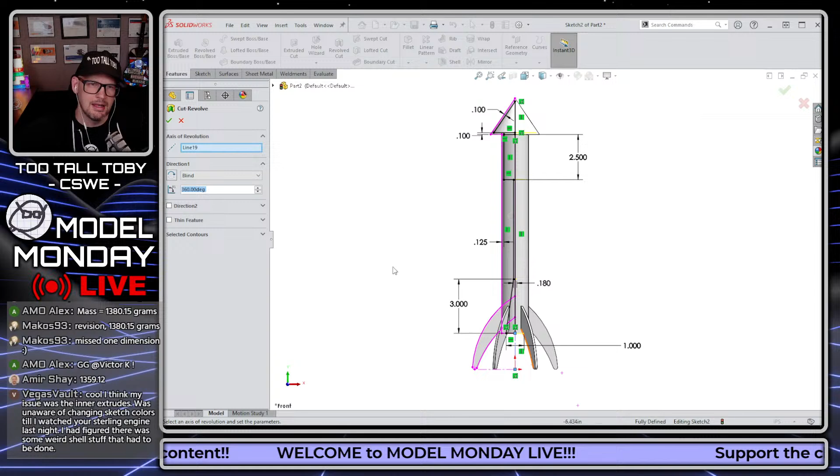It's a nice clean sketch with one single center line, so SolidWorks automatically picks up on that center line. Now I can hit the green check mark, and let's look at this thing in a section view. Oh yeah, that looks real good. If we look at our sensor here, Control Q to rebuild, the correct answer is 1776. So we did it, we got it correct. Well done.

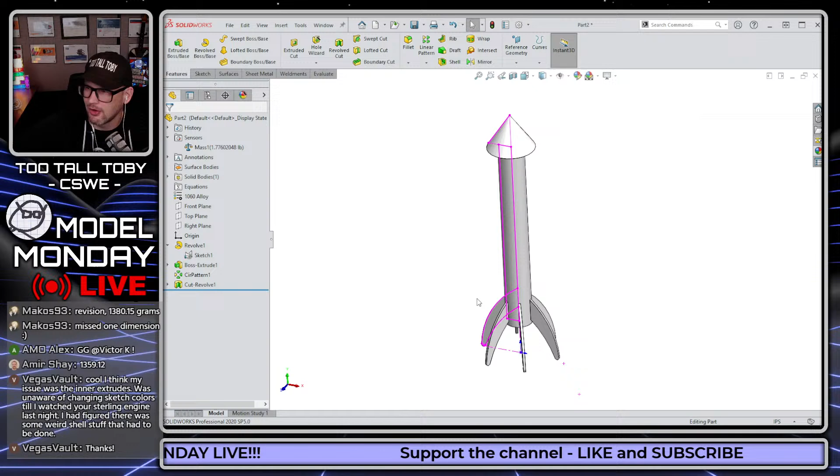So now one final little tip here is the ability to candy stripe this model. The way that we can do that, let me hide this sketch that was here. We can candy stripe this model through using what's called a split line.

What a split line does is it lets you create sketch geometry and then use that sketch geometry to take a face and split the face. So I could go insert curves, split line, and take this current sketch and project it onto this surface. When I'm done, that surface is split into 3 surfaces, so now I could color this one red and this one white, and I'd have that candy striping.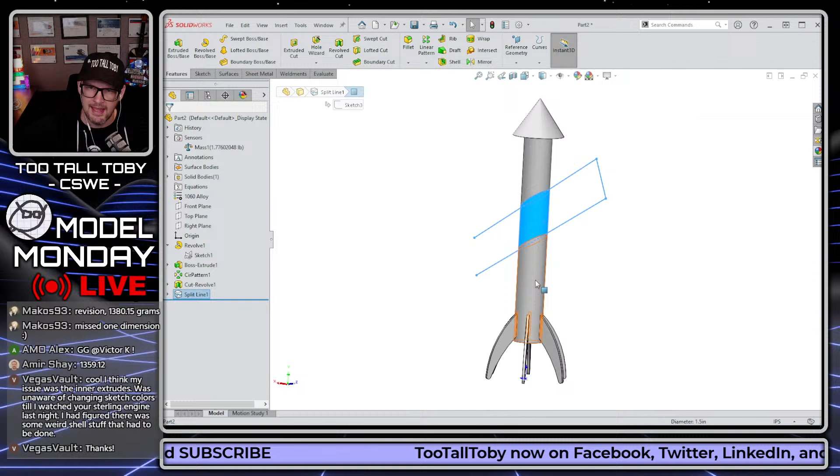Well, we're not doing this with just a sketch. We're doing this with an actual 3D curve, so we have to generate that 3D curve. This is an old trick that we learn in advanced part modeling or in surface modeling.

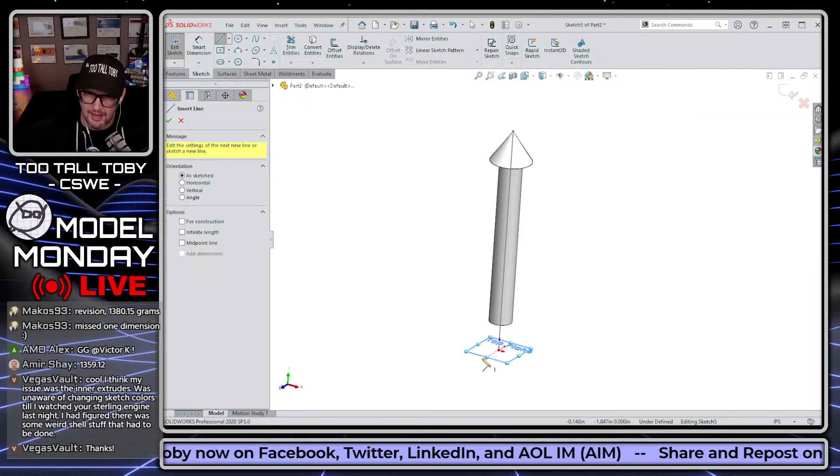The trick is: go to the front plane, begin a sketch, and sketch a line. This line is going to act as a sweep path. Then go to the top plane, begin a sketch, and sketch a line on the top plane perpendicular - this line is going to act as a sweep profile. Then go into the command Surfaces and choose Surface Sweep, and you can sweep this profile along this path. There you go, there's a surface sweep.

But in the definition of a sweep, you can go into options and say twist along path or specify twist value. So I could say I want this to twist to a total number of revolutions of 4, and boom, that gives us a nice twisty surface that I can use to split this face.

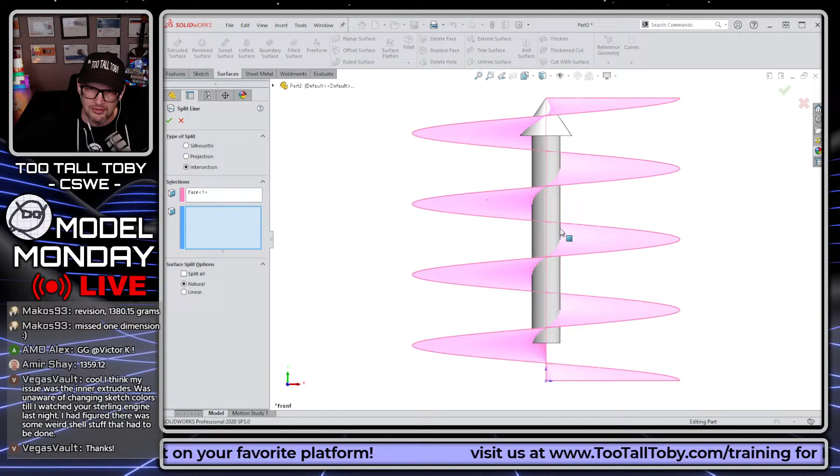Now, the truth is I can't split this face right now. If I go to Curves, Split Line, and say intersection - instead of projection which you use with a 2D sketch, we're using intersection to intersect this tool against this surface - the thing is, this tool is not actually splitting that surface and leaving us with 2 separate faces. So it's not going to work if you just have one of those little twisty things. What you need are 2 of these little twisty things.

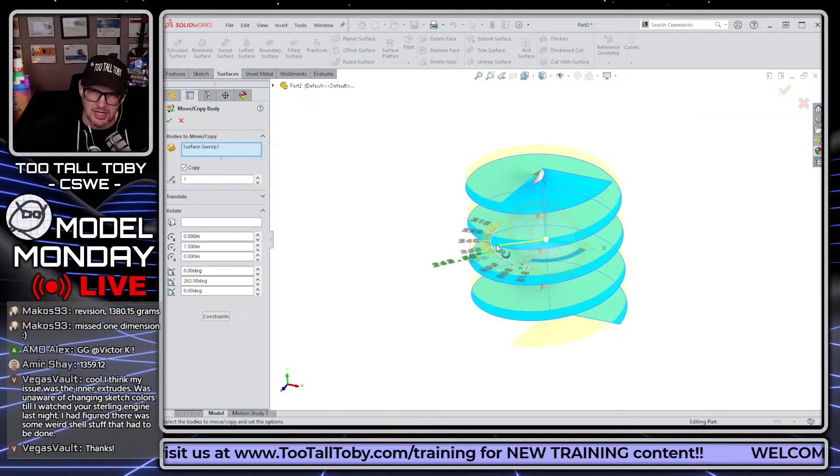So if I go to the command Insert Features, Move/Copy, I can make a copy of this body, and then use the rotation option and rotate it around 180 degrees. Or if you wanted 3 copies, you could probably do it with a circular pattern too. But the point is now I've got 2 bodies here: surface body 1, surface body 2.

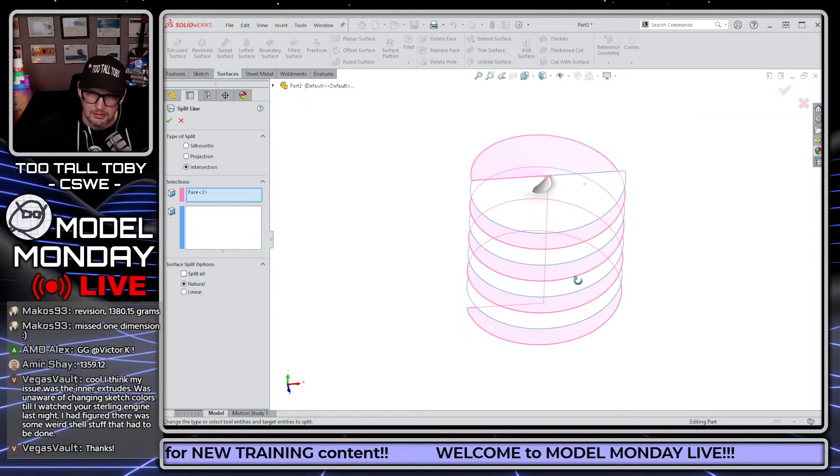So now if I go to the command Insert Curve, Split Line, I can choose intersection and choose both of these bodies. There's one body selected, there's two bodies selected - both of these bodies are now selected as the intersecting tool. Now I can go down here to the face to split, and choose this face here, and there you see that candy striping, splitting that face.

So now I can hit the green check mark, and now I can delete these bodies - I don't need them anymore. So Insert Features, Delete Body, or just pick the bodies from the tree and press delete on your keyboard. Delete those bodies, and now I've got that candy striping.

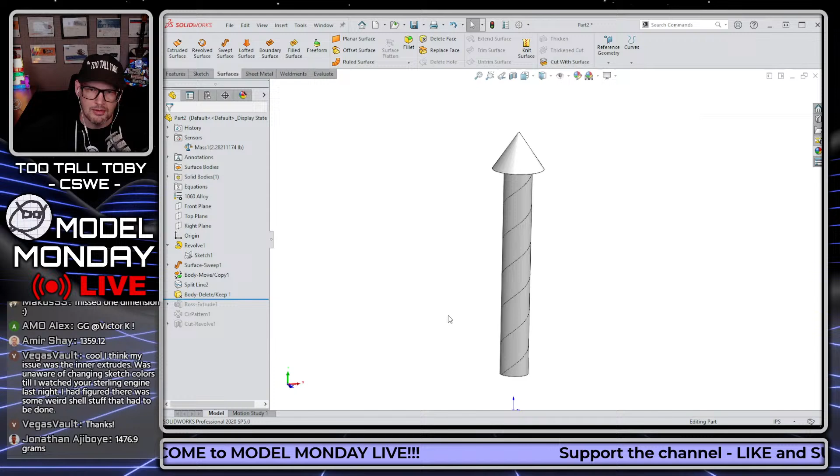So now I could go in and say I want the whole part to be blue - I'll double click on blue here to make the whole part blue. And I want this face to be white, so drag and drop and pick the face. Then I want this face to be red, so drag and drop and pick this face here, picking face from the flyout menu. So now the remaining features get added, and there we go.

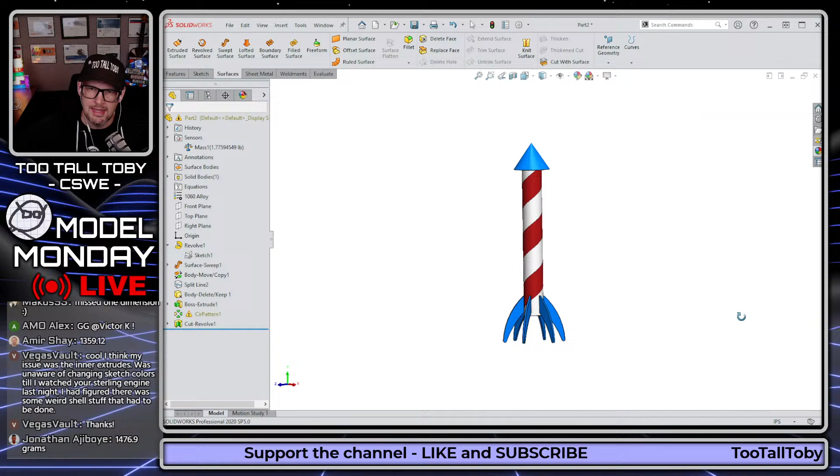That nice candy striping along that face. So that's a combination of doing a surface sweep with twist, then doing insert features, copy body, and then doing the insert features split using intersection, picking those two bodies and then picking that face, and then adjusting the color just for those faces. Pretty cool, pretty cool.

Zhao says, don't forget to go to the barbershop. Yep, remember to go to the barbershop. That is good advice. So 1776 is the correct answer for that one.

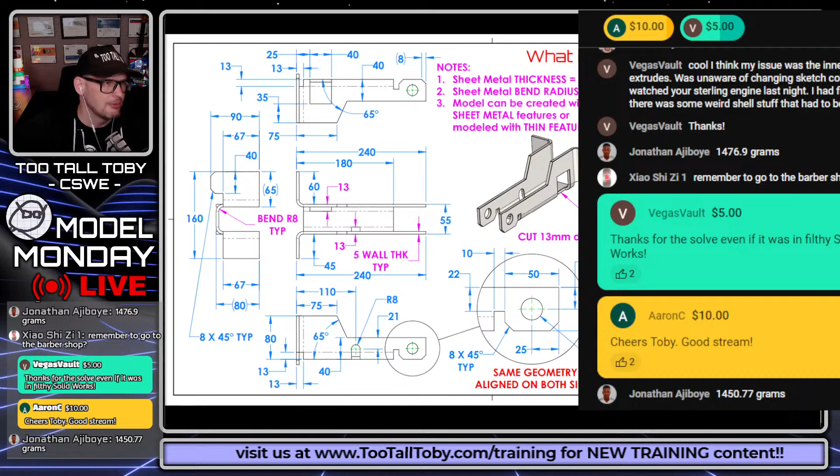TooTallToby.com/donate. All right, thank you guys so much for that super chat. Let's get into it here. Our final answer for this one. A lot of answers coming in for this one. This is not an easy model. This is sheet metal. Welcome to the world of sheet metal. Let's see what we got here for our sheet metal answers.

First one that came in here was from Victor K, 1412. Victor K revising to 1380. Ace coming in, 1380. We got Aaron C coming in, 1390. We got Aaron C coming in revised, 1380. Very nice, very nice. LCR Brick says...

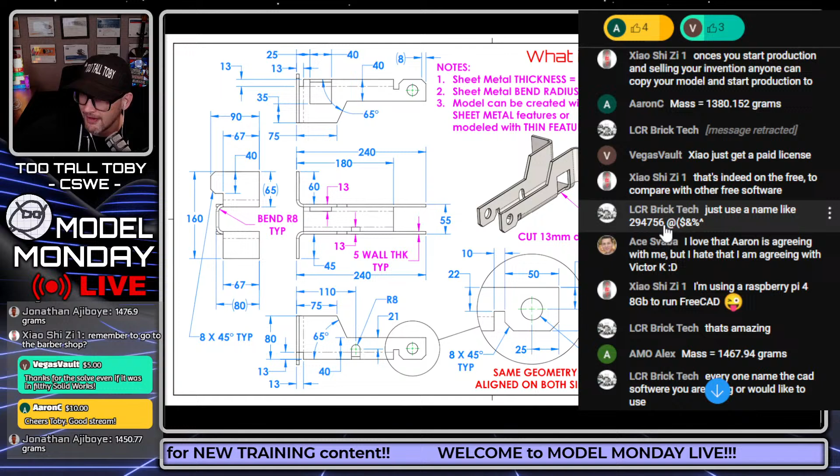294756, at parenthesis, dollar sign, ampersand, percentage, and caret or exponent symbol. I think it's probably pretty close.

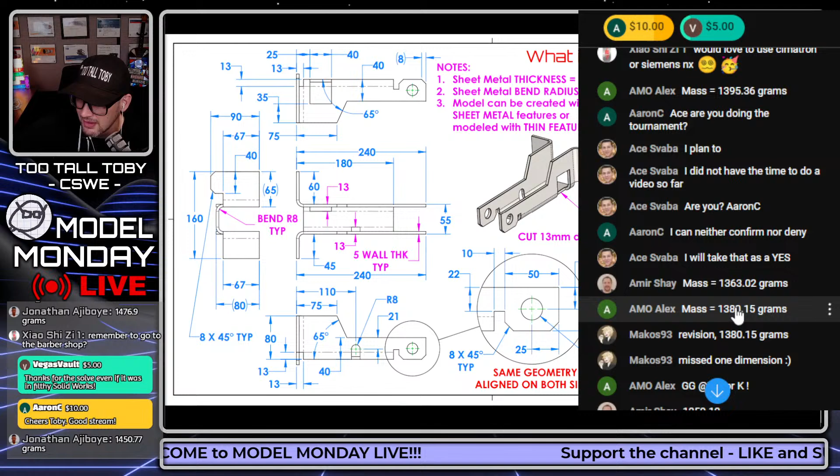We got AMO Alex coming in 1467, revising to 1434. Makos coming in 1367. Very nice, very nice. Mr. Alex 1395. We got Amir coming in 1363. Mr. Alex revising 1380. Makos revising 1380. I love seeing the convergence here. Amir revising to 1359. Jonathan coming in 1476. Very nice, very nice. And Jonathan revising to 1450.

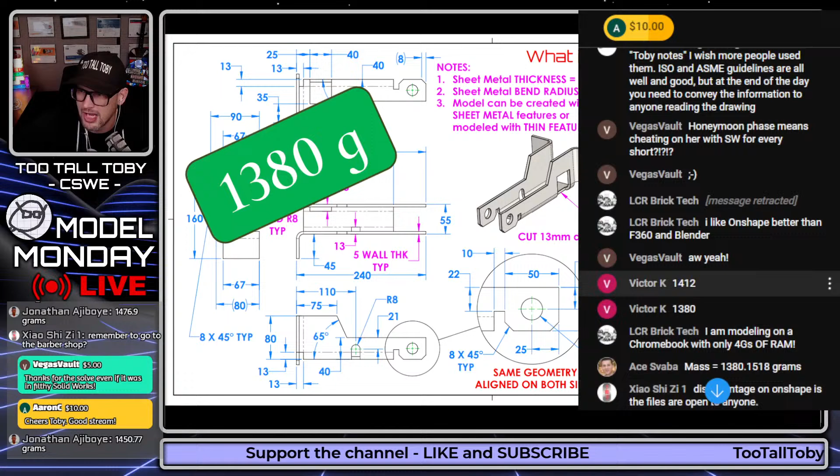Guys, the correct answer for this second challenge is 1,380 grams. So that one is going to go to none other than Victor K, the world champion of 3D CAD speed modeling. GG, Victor K. That's going to earn you a point on the July Model Monday Live leaderboard. Well done, well done, well done to everyone.